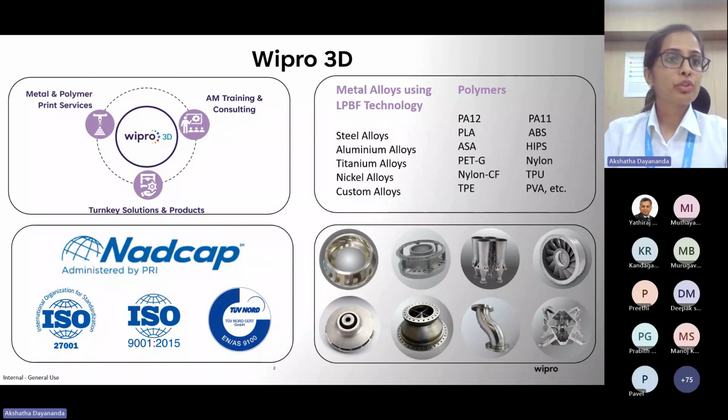Since Leela has already introduced me as well as the topic for the day, I would like to briefly introduce Wipro 3D because it's important for you all to know the company and the capabilities that we represent today. Wipro 3D has three major offerings. The first one is print services. Wipro 3D provides print services with both metal as well as polymer. This has been a long-lasting offering of ours from a long time.

Based on all the experience that we have gathered because of the print services, we also offer AM training and consulting. So all the knowledge learnings that we have, we like to share it, and this we do it in the way of training and consulting. Other than this, we also help AM enthusiasts set up their own AM center, which we call turnkey solutions. So we engage with the interested customer, understand what their specific need is, and then tailor make a facility like an AM COE center or a production center, and we deploy it for them.

We can also operate the center for a few years and then hand over the center completely to customers with printers, accessories, softwares, everything. And it must be noted that Wipro 3D also makes polymer printers, and that is the products offering that we have. We have a polymer printer which works on the principle of FFF technology. It's called F300-2.

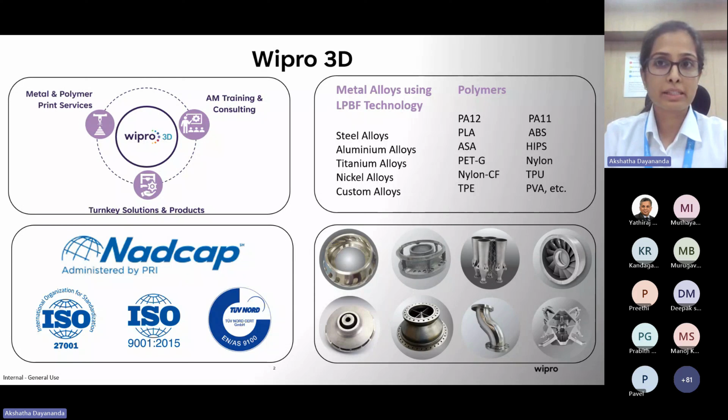So coming to today's topic, the first and foremost thing that we would be going through are the case studies. We have categorized these case studies into proficient geometries, material innovation, reduced part counts, and in-space manufacturing. So we will discuss case studies in these categories. We will also then be able to understand what are the current trends and innovations happening in these four fields. And you will also get a glimpse of what is coming in the future.

One very interesting thing that everybody should note here is that these are also the value additions that AM brings to the table. So proficient geometries, or efficient geometries, or let's even say complex geometries, is a value add that additive can bring to the table. Material innovation. There might be materials that we can print now and maybe not before, or maybe we can print two materials together, right? So this is another value add that is put on the table by additive.

Reduced part counts. It's also called monolithization. It's also called part consolidation. So we have all this grouped under reduced part counts, which is also a value add from additive. And last but not the least, in-space manufacturing. I think this will be the coolest part of the webinar. I'm looking forward to presenting all of these to you.

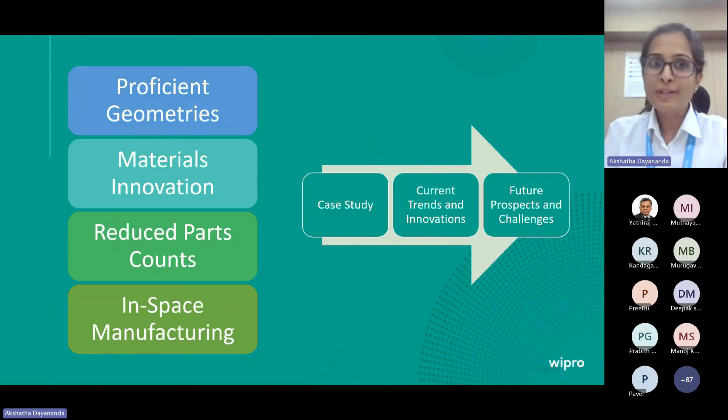So let's get started with proficient geometries. Here is an example by SpaceX, and this is a Draco engine, and this is amongst the first rocket engines to be 3D printed entirely. Why I say that is because now there are a lot more engines that are being printed. And just to highlight, if you look at the region which I am highlighting now, you will see AM achievable geometry put up there.

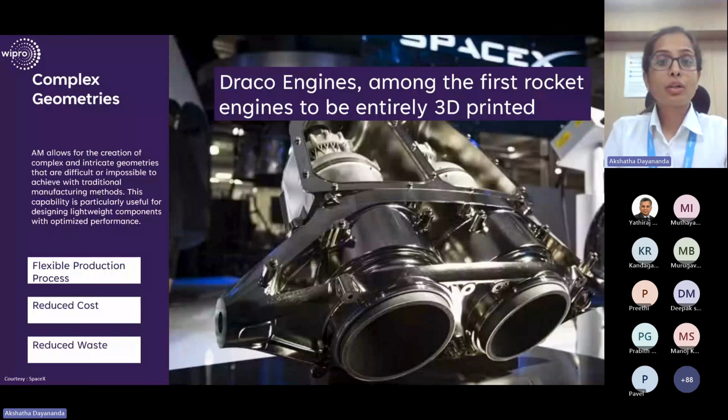So it is possible to achieve extremely complex geometries using additive. And the value add over here that SpaceX saw was that they had a very flexible production process. So any small improvements, changes that they want to make, it's very easy to start implementing these changes. Very often people think that additive is extremely expensive, but in this particular case, the component was delivered at a reduced cost and also reduced waste condition. So this is quite a critical part, which was the rocket engine.

But here is another example, and this time it's from Japan. And it's a very unique kind of example over here. If you look at the lattice kind of structured part here, these have been used as shock absorbers. So they're all fitted at the places where the green mark goes, and they basically act as shock absorbers when it lands on the lunar surface, right? And it is designed to crush on landing so as to give a softer impact. So very unique solution that they have used additively manufactured part for. Again, it is a complex geometry, but works very efficiently.

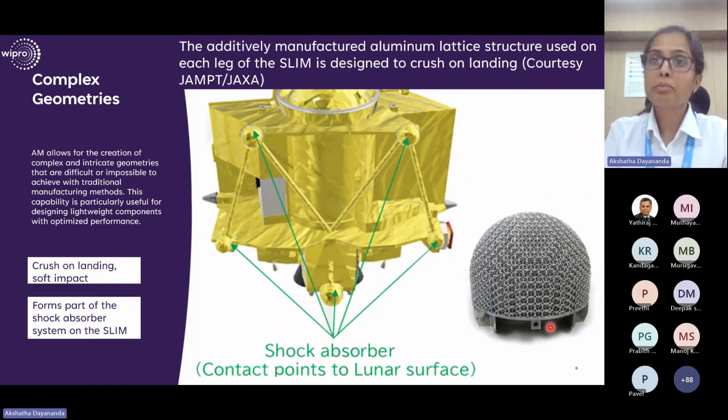So we at Wipro 3D have also been making some very complex structures. For example, MINS cluster is one of it. And you can see how complex the geometry is. This is made from AlSi10Mg. It is one of the alloys of aluminium that we can print with. And many different parts were also integrated with this one. So it's complex. It also has part integration. It also performs better. So it's our observation that any one application usually has more than one value that is delivered. And that is what is mentioned here.

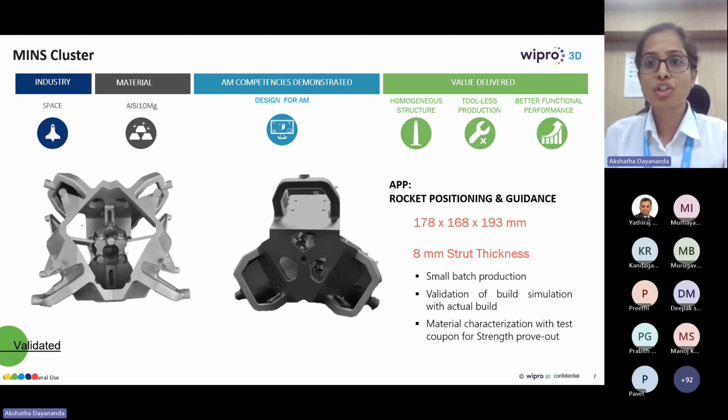So this is a stationary part that we have. And in the next example, here we have a rotating part. So this is an impeller also made with AlSi10Mg. And you would definitely understand that these moving parts or rotating parts are a bit more difficult to qualify or get certified with. But this is the trend or the state of the art thing that I wanted to show, that we have slowly gained confidence with the stationary parts, and now we're moving to rotational parts and more critical parts. So this is the trend that I would like to point out to with these case studies as we progress.

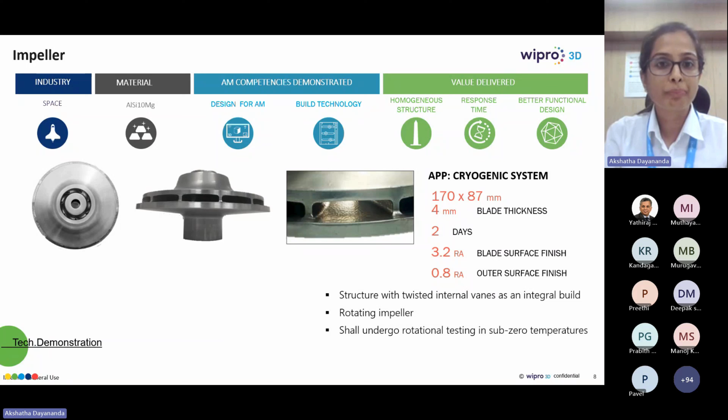Now, the advantage that you get when you do this with additive is that you get the parts faster and you don't need too many numbers of it, correct? So you may need a couple of them. So these kind of cases, quite large parts, but also where the design is very unique, you do not want to spend a lot on maybe tooling or machining, programming, setup, and things like that. Additive becomes a great tool over here.

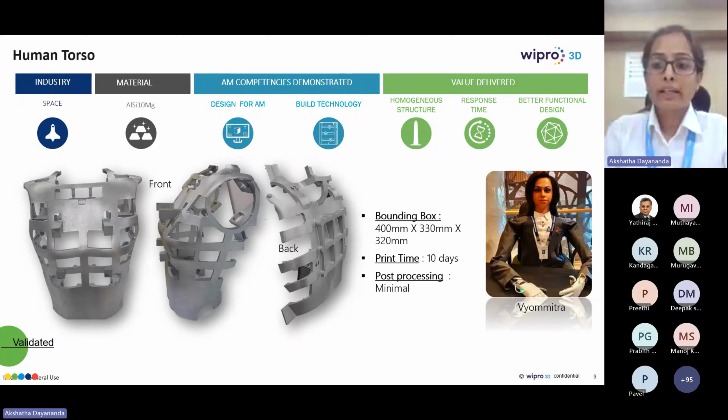So with this section, we have seen some of the complex geometries that are possible to achieve with additive manufacturing. But again, I would like to reiterate that for any one case, it's not that we will have only one value addition which AM brings. There could be more than one.

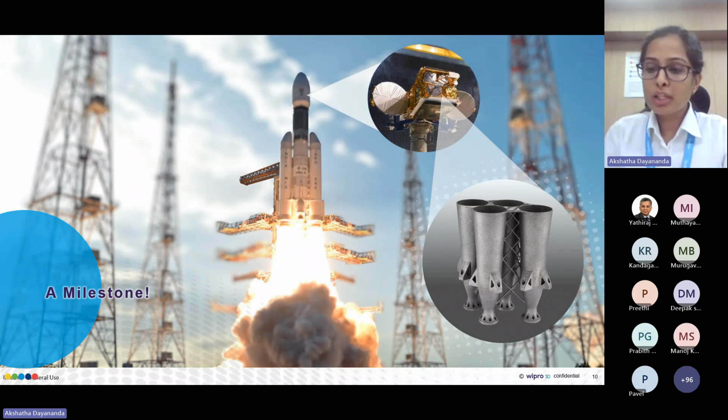Let's move on to see what's happening in the world of material innovation when it comes to AM and space applications. Here is an example where a multi-material, basically two different materials are used here when I say multi-material. A multi-material nozzle has been 3D printed, and a lot of testing has been done on this particular injection nozzle. So this has been achieved by Quadrus Corporation's Advanced Manufacturing Division.

When you have two materials, what is happening over here is that the thermal management has become better, as in the part is able to manage the thermal loads better, and the design can be very complex as well. So the company has overcome numerous hurdles which are associated with the bimetallic process.

So the most proven process for additive manufacturing is LPBF, which is laser powder bed fusion. And printing with two metals in this particular technology can be quite challenging, and there are a few hurdles. So now I'm also bringing about some challenges that the industry sees or the technology sees, right?

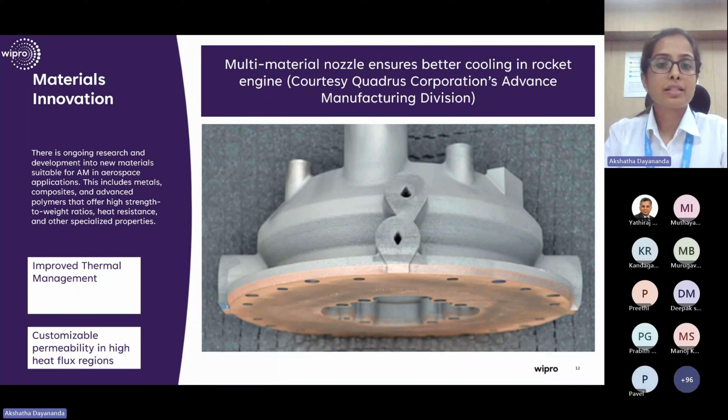Another one is printing with magnesium. So this is again from Japan. It has a group of companies which have worked on this. So it is known that magnesium is much lighter than, let's say, even conventional aluminium, but it could deliver the same kind of function. So here they have developed the process, or refined the process, let me say, to print with magnesium.

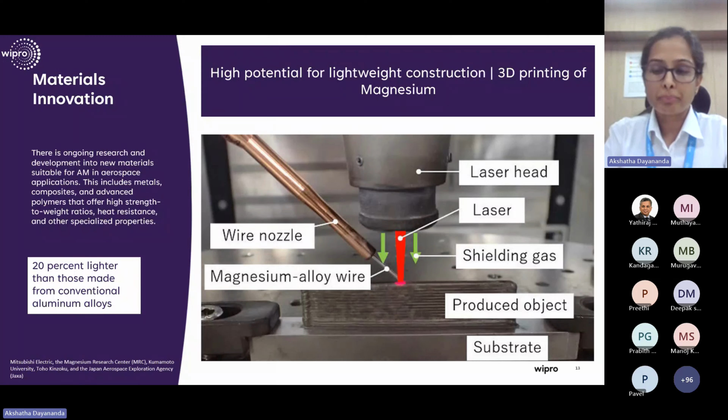At Wipro 3D here, we have also done similar projects where we have adopted a very new material to be processed through the LPBF technology. One such example is the heat resistant steel. Now, the part over here is called the inner ring, and the material that is used to print this is heat resistant steel, for which there were no existing parameters.

So Wipro 3D made the specifications for the powder, bought the powder, developed the parameter sets, and also reverse engineered the geometry, and then delivered the entire solution to HAL, which was certified by CEMILAC.

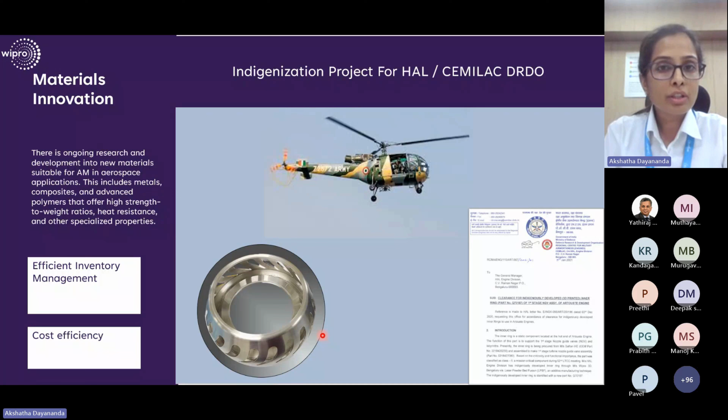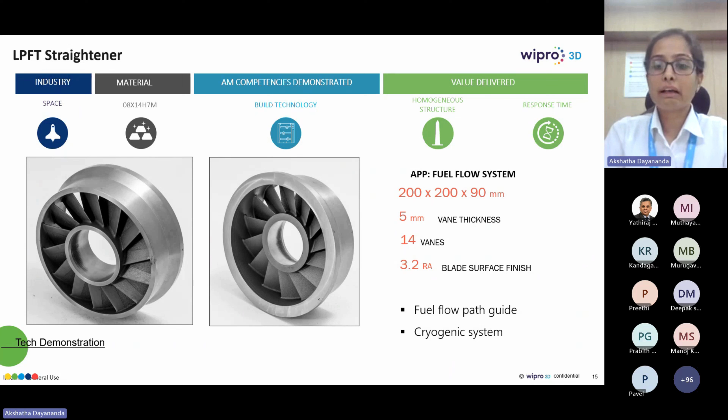So here, this is an aviation kind of an example, but we have done something very similar for the space sector also, wherein this LPFT straightener or straightening device has been printed with a material called 08X14H7M, and this is also one such innovation. So there are probably newer materials, or like we saw in the first case, a combination of materials that can be printed with additive, which will give us parts that perform exceptionally well. So this is another trend that I would like to bring to your notice.

Now, the third set of case studies are going to be on reduced part counts. And like I mentioned before, some people address this as part consolidation, some people address it as monolithization. So basically, it is about systems design. You combine the design so that the part count reduces, but then you're looking at how the entire system works rather than how the component works.

So here is an example from a company called Northrop Grumman. Now, what's special about this is that there is consolidation of parts over here, which improves the performance, reduces the cost, reduces the lead time. But what's special was that this is done even in the electron beam powder bed fusion technology, or even with another kind of metal printing technology, which is called DED. So these kind of complex parts or even huge parts can be done not only in the laser powder bed fusion technology that I mentioned before, but DED and electron beam technology as well.

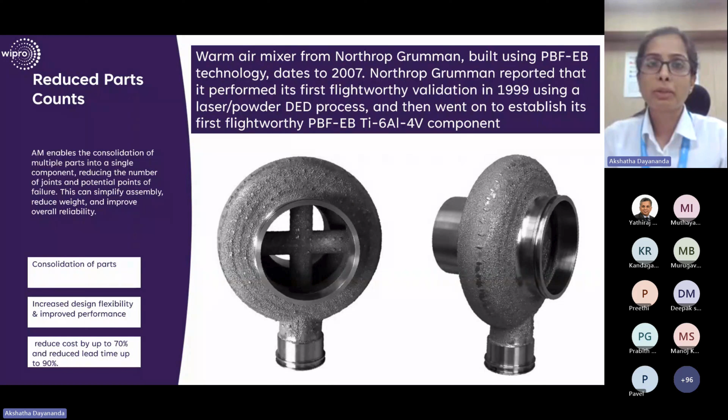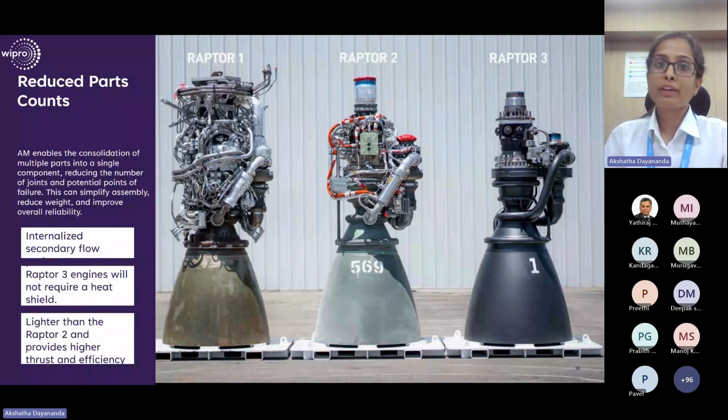Very recently in the news was this particular engine, which is Raptor 3. So that's the image that you see on the far right. And the image that you see on the far left is the Raptor 1. And you can just see how many different parts have been combined to make the design much more elegant and efficient, right? So all the flow paths for which all this wiring was needed have been integrated into the design. I have a picture of the cross section as well, so I will show that. This is a much lighter part and a much more efficient part. I think this is where we start moving from almost science to art in a certain way.

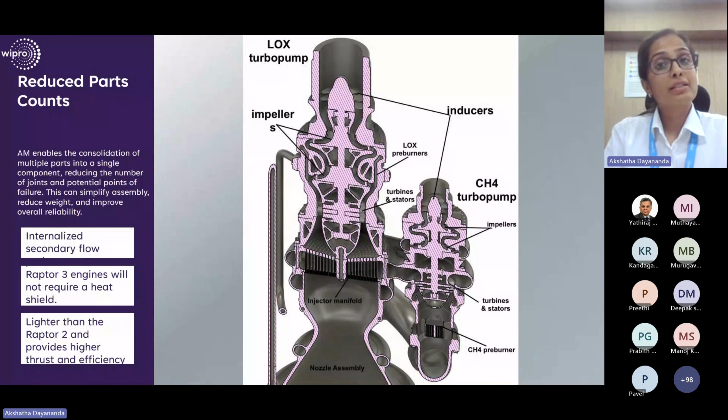And here's the cross section of the same part. This is by SpaceX, this engine. Let me go back and let you have a look at the cross section and how complex it is. It's not that this was done in one part. Again, this was done in a few sections and joined together. So this is not one full build, but nonetheless much less than before. So they have reported that they have 21% more thrust, while being 7% lighter. So this is the advantage of reducing the part counts.

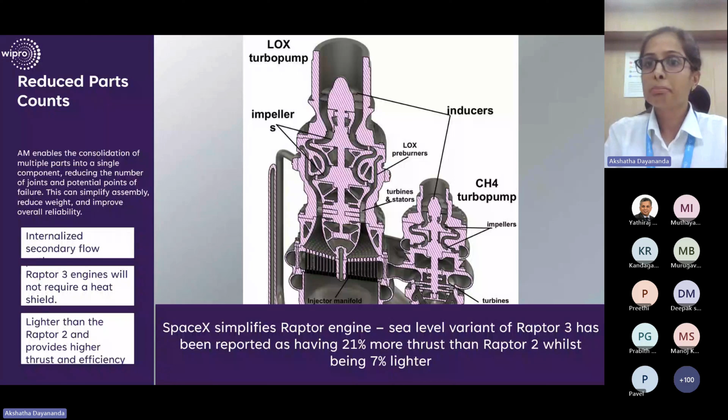And here's where we would like to show you another milestone that we have reached along with ISRO. Thanks and hats off to ISRO for designing the PS4 engine, the PS4 combustion chamber, in a way that it could be 3D printed. So the geometry you're seeing over here. And this is to power the fourth stage of the PSLV.

PSLV is ISRO's workhorse launch vehicle for Earth observation and scientific satellites. Here, consolidation of multiple intricate components was done into a single unit, thereby boosting the production efficiency and also the structural integrity. And ISRO comments that this is a step forward when it comes to sustainable space exploration.

The hot test of this particular component was done on the 9th of May 2024. It was all over the news. You can also look it up. And it was to deliver a thrust of 7.33 kilonewton in vacuum condition. So this is a very great milestone for us, and it is our joy to share it with all of you.

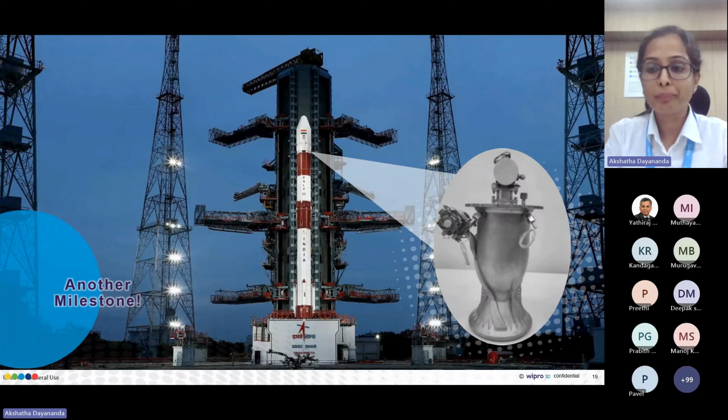Then we have also had a lot of waveguides with very complex channels like this that you see on the screen being made. The first one you have already seen. This is the feed cluster, and there are many more that we have worked on.

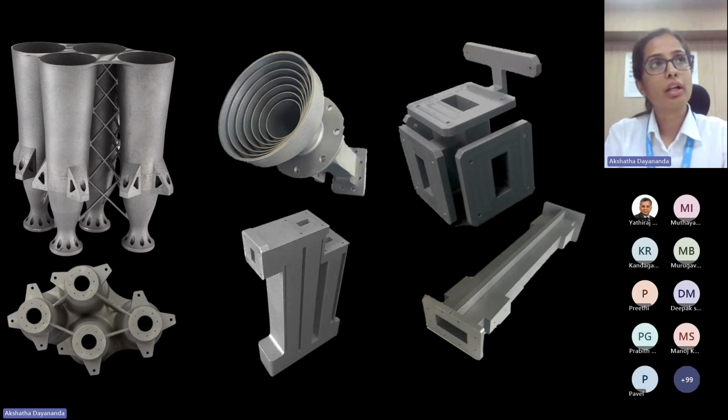Now moving on to the last section, or the value add, wherein I will share some more case studies, is the in-space manufacturing. I'm quite excited to share these examples, and I hope you will be equally excited when you hear about this. So this is an exercise by NASA, wherein they sent a polymer printer to space, and they also printed in space. So what they printed was a simple tool like this, but also you could say a calibration part, like what you see over here. And it was brought back to Earth, and measurements were made. So that's really very cool.

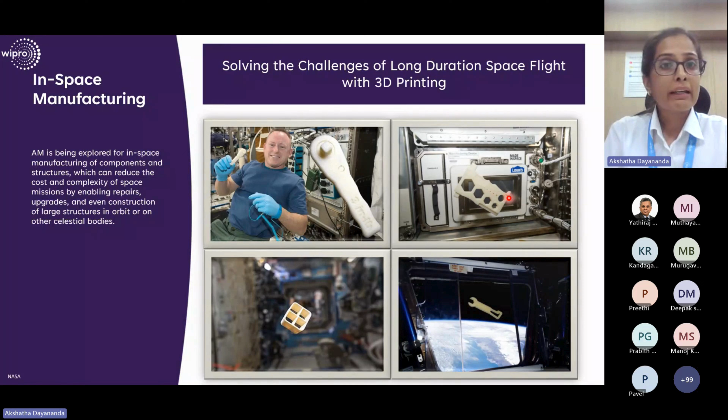And if you were thinking that it was only polymer, the European Space Agency, ESA, along with Airbus, sent a metal printer to space as well. And they have also printed these coupons in space. This was done with SS316, and the form of the raw material was a filament.

So here also there were quite some adjustments, or let's say adaptations, that were made, as in the metal printer had to be as compact as, let's say, a washing machine. And printing in vacuum comes with its own challenges. This printer is able to print a volume of, let's say, 9 centimeters high and 5 centimeters wide. So that's how much it can print. So this exercise is also being done by ESA.

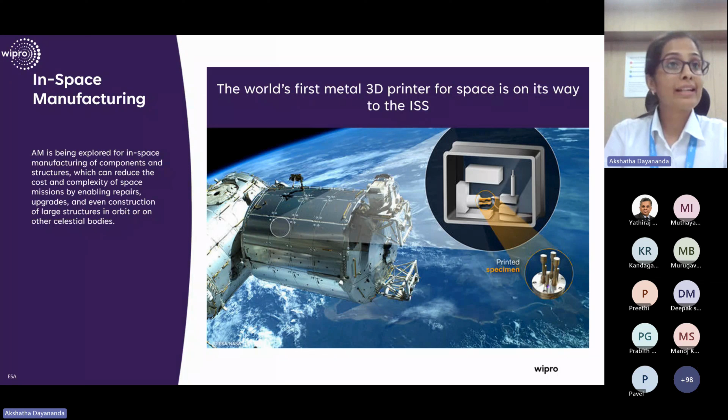But I think the most interesting one would be this. So does this look similar? I hope so, right? It looks like a Lego block, and it is done between Lego and ESA. So what they are trying to do is evaluate if using soil, let's say lunar soil or Mars soil, you can make blocks like this, like the Lego blocks, and then stack them on one another to have a construction of some sort, like a shelter, out in space. This has not been printed in space or on Moon or on Mars.

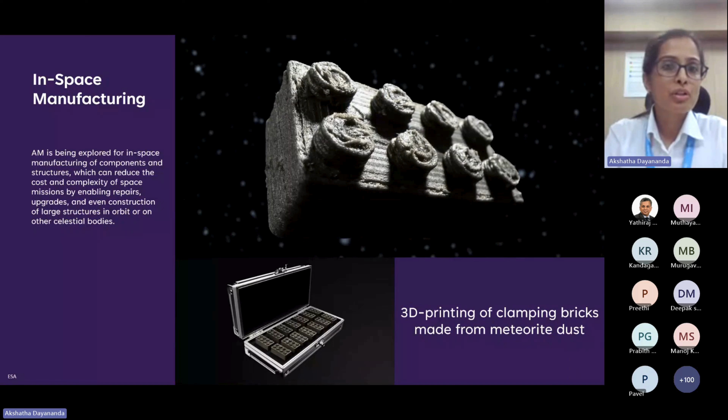What they have done is they have located a meteorite, which is 4.5 billion years old, which they found in North Africa about 20 years ago. So they collected that meteorite material and they have mixed it with PLA, and then they have printed this on Earth, and they are calibrating or checking if the same can be done with, let's say, the lunar soil, right? So this was also something very cool.

Now, already I have shared some of the challenges, right? Like, when you're trying to print with two different materials, what are some of the challenges? When you try to print in vacuum or in space, you already know what are the challenges. So I've mentioned a few challenges, but there are some other generic challenges that I will also point out. But instead of thinking of them as challenges, I would really like to represent them as possibilities.

For example, if I look at the design and engineering part, today the challenge is that there is a lack of design engineers who are well aware of the AM process. But it also means that it's a possibility, right? The more people get trained on this, we will have much more complex or efficient designs.

Also in manufacturing, there's a certain limitation of size. We can't do very huge parts, or maybe when it comes to material, we can't do a lot of materials, maybe not as many as in casting process, or maybe the production cost is high. So it's always a possibility to come up with new processes or technology which can resolve this problem and print really large parts or print different materials and at a lesser cost.

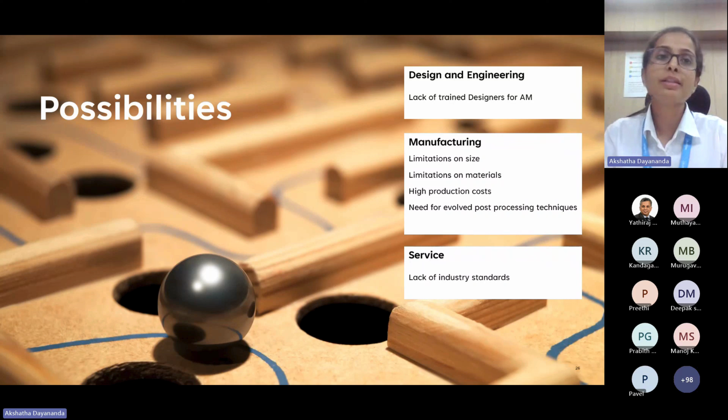When it comes to the service, there are a few standards which are available today. There are not as many as for other conventional processes. That's a challenge, but it also means that a lot of research can be done by the educational institutions or by research centers to develop and contribute in developing these standards. Which brings me to the almost last kind of a section, and that is the regulatory advancement.

So we did an exercise in the beginning of this year wherein we tried to see how many standards are available for AM. So ASTM, which is the American Society for Testing and Materials, they have set up this F42 committee or organization, which is like the oldest committee which have been developing standards for AM. And they have 8 subcommittees.

So if you look at the year-wise data, you'll see that the number of standards that they are putting up every year is going up. So there are quite a few standards which are available today as compared to, let's say, 5 years back. And you see this big spike in 2023. When we did the exercise, we were in early 2024. So probably they would put out an equally good number of standards by the end of even this year.

Now, if I try and see in what category were most of the standards developed, and the categories being design, manufacturing, materials, quality, etc., then the highest number of standards have been published for materials, right? It's close to 30 standards. And there are definitely standards for design, for manufacturing, and also for quality. They have put out standards which are material specific and also which are industry specific.

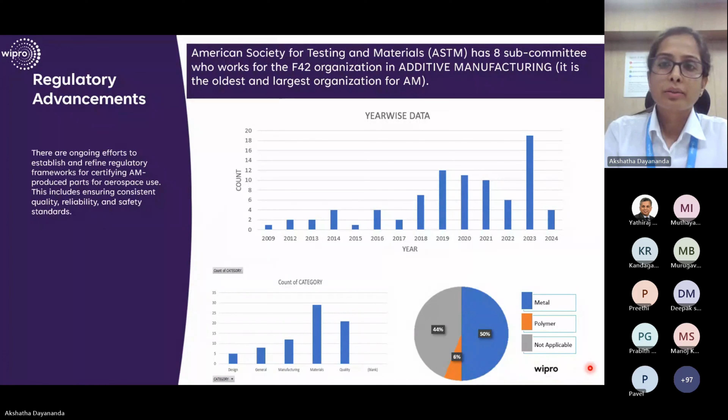And how NASA is able to do this is because they have put in a lot of guidelines, they have put in a lot of standards themselves. Of course, these are all internal standards, and they have this methodology of certifying or qualifying the parts. And once they've gained that confidence, they are able to put these many parts in space.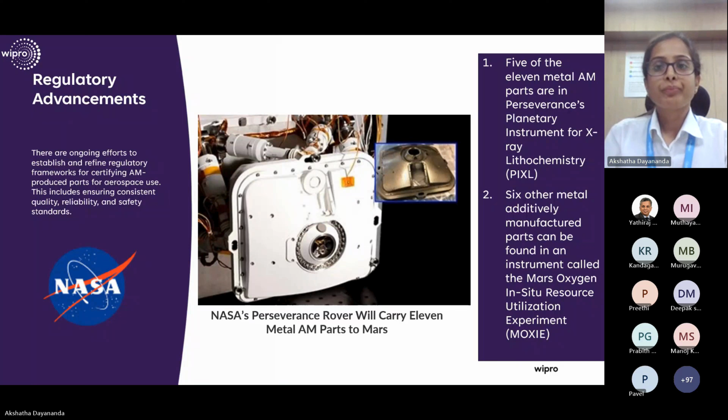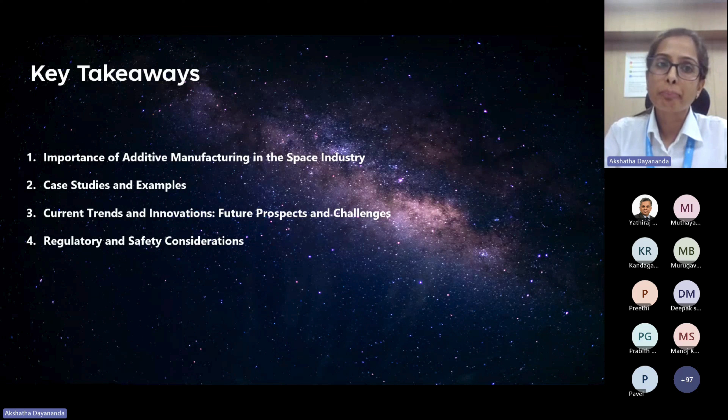So over here, I hope that we have stressed the importance or the values that have been contributed by additive manufacturing to the space industry. We also discussed a lot of case studies and examples while understanding what is happening now, but also what are the future prospects and challenges to overcome. We've also seen some regulatory and safety considerations.